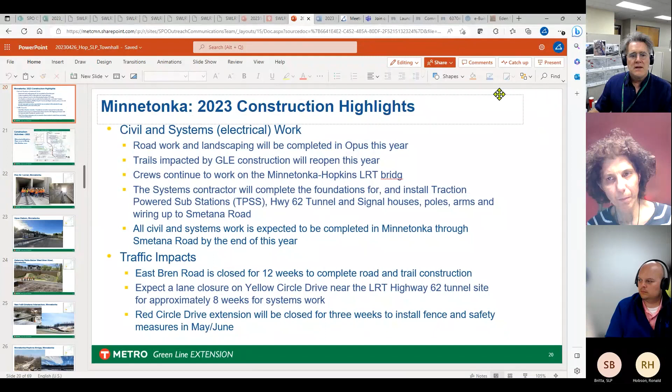All right, for the last time, this is the Hopkins St. Louis Park Virtual Town Hall Green Line Extension Update. It is April 26, 2023.

Today our topics are going to be a general project update, then we'll go through 2023 highlights, talk a little bit about the systems work, which has now begun in the western part of the corridor, as the civil work has been finishing, about 98% through some of that civil work in Eden Prairie and Minnetonka. We'll also cover a brief communications and outreach update, and then questions, answers, and discussion.

This is a familiar slide to those of you who joined us before, where you can see it's a fairly large footprint. Most construction footprints aren't nearly this large. People have apartment buildings and they're complex enough, but we've got 16 new LRT stations, 44 significant structures. You can see a lot of the bridges we've already completed, at-grade crossings, miles of retaining walls, and a lot of complex construction in new right-of-way from Eden Prairie to Hopkins, and then from Hopkins to Minneapolis.

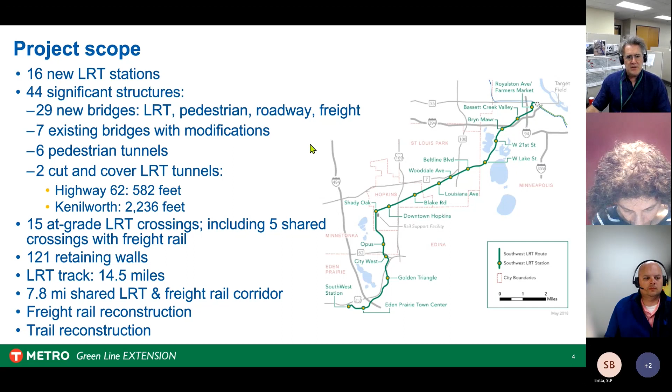For about 7.8 miles, we follow the rail corridor, and we've been partnering not only with our cities but also with freight rail carriers in order to complete that construction. Again, this is a familiar map or slide to those of you who have seen this before. You can see the various stages of construction.

The first year was essentially taken up with a lot of utility work, a lot of underground work. About 2,000 public or private utilities had to be relocated, plus quite a bit of infrastructure we needed to put underground before we could begin what most people identify as civil work—the structures, track, and stations. The second stage was site prep, where we had to take down a couple of buildings.

We have a lot of easements—about 157 easement properties of various sizes that we had to obtain. And then we do the structures and track.

You see a lot of that work today, particularly in Hopkins and St. Louis Park. We'll continue in each segment with the systems contractor as the civil work in the segments is completed. We're already starting to see that now, particularly in Eden Prairie, where you can see the catenary poles. We'll do some wiring there as well later this year, and we'll show you some pictures of that later in the presentation.

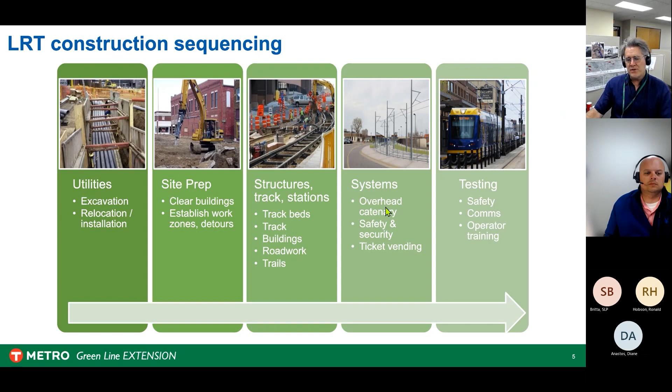When all that is done, we're going to be focusing the next couple of years on a lot of the civil work that still remains in the eastern part of the project. We still have quite a bit to do. We'll do the testing, which will take about 6 to 9 months.

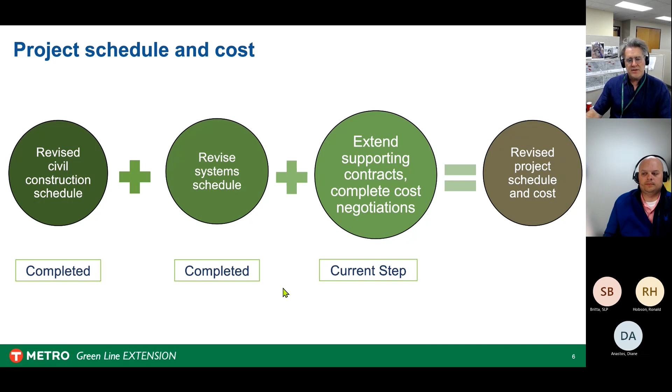We've had some changes, some scope increases to the project that we had to include after we finalized our contract, after it went out to bid and the bid was accepted. We had to add a few things—some of you may be familiar with those, like methodological changes at the Kenilworth tunnel, the town center station, and the corridor protection wall.

We've had to revise the construction schedule, which of course then affects the system schedule, which was already out to bid—we had to revise that as well. When that's all completed, we're now in the process of supporting contract documents, and then we'll come up with a more precise project schedule and cost as we go.

All right, the highlights. We're going to start in Eden Prairie. We thought it would be good to give you a broad view, so we'll go through the whole corridor, but we'll focus a bit more on Hopkins and St. Louis Park.

These are some of the things you can expect this year in Eden Prairie. The biggest issue here—you can read through this—but the one I'd like to highlight is Phase 2 construction at Southwest Station. For those who followed that construction, we've completed the first phase, the largest phase, and added a new parking ramp.

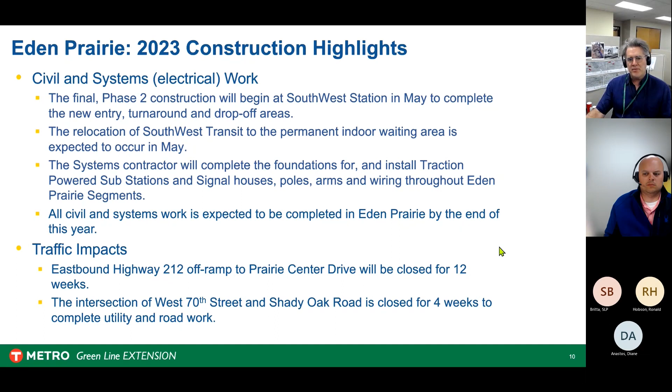The largest impact down there is rebuilding the Highway 212 off-ramp to Prairie Center Drive, which will take another couple of months. Some details here for those who want to look back at the presentation—we basically are just trying to place some of those impacts and some of the work being done throughout the Eden Prairie portion of the corridor.

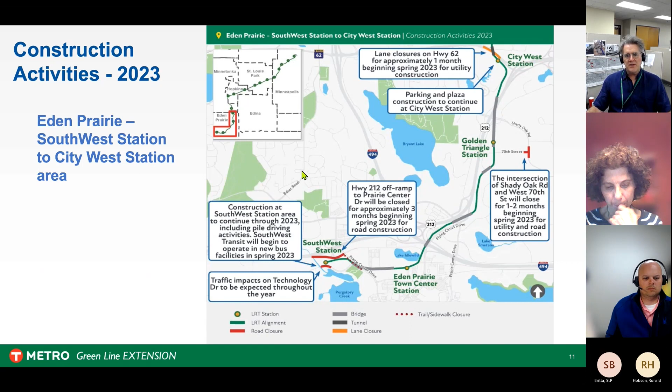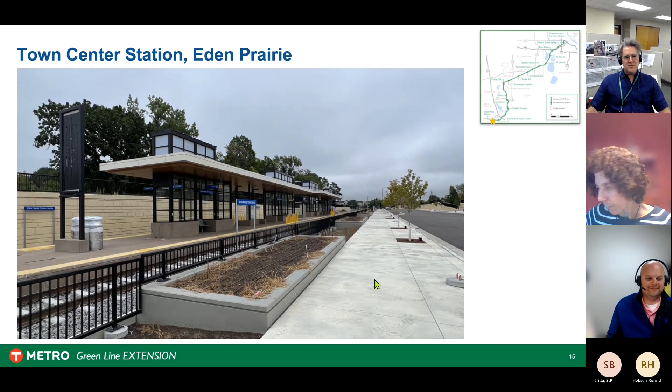And if you continue across our Prairie Center Drive bridge, you can see our Town Center Station bridge. That is actually not a drawing, that is actually a photo, which looks remarkably like the drawing we have shown for many years. It's nice to see that progress in real life.

Continuing on over our Valley View Bridge, through past Flying Cloud into the Golden Triangle area. Just west of West 70th, you enter our Golden Triangle Station. And in the distance, you can see our Highway 212 Shady Oak Bridge.

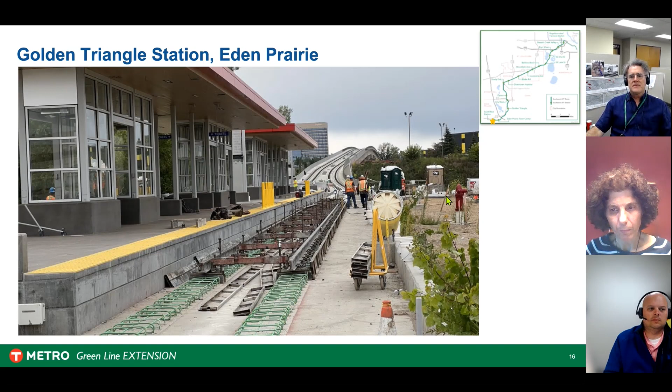And this is looking at that same bridge from the other side. I like to always give a shameless plug here.

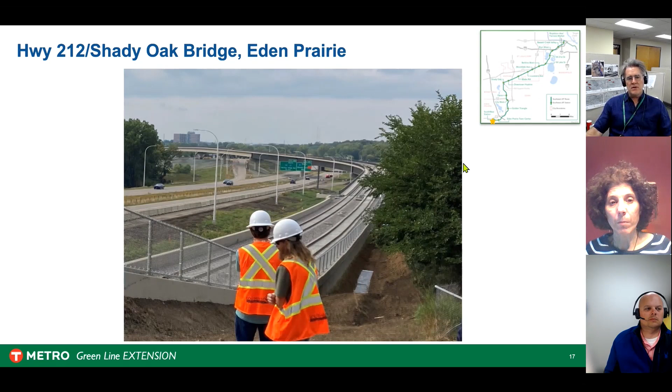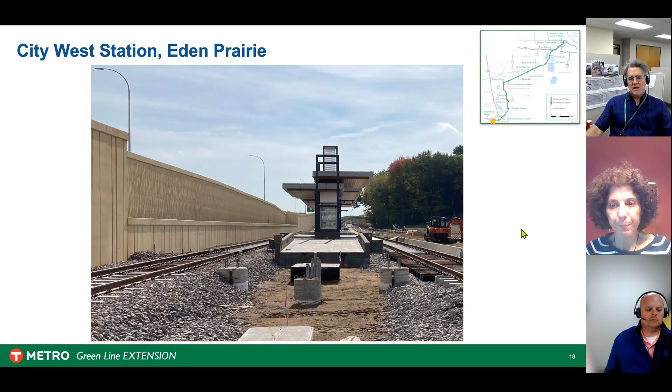All right, continuing from that area where those 2 folks were standing, we take a hard westerly turn along the south part of Highway 62 to our City West station, which backs up to the Optum campus. For those of you who know the area, if you continue a little bit behind the person taking the photograph here, you enter into our first tunnel, and we go under Highway 62 through the tunnel into Minnetonka, into Opus Park. Again, some of the highlights of the systems and civil work this year in Minnetonka.

Again, we'll continue to work on the Minnetonka-Hopkins Bridge. Most of Eden Prairie and Minnetonka, the segments I mentioned earlier, are expected to be substantially complete and turned over by the civil contractor, and most of the systems work, electrical work, done by the end of this year. So that work in that western quadrant is advanced. We expect to have most of that done, but the Minnetonka-Hopkins Bridge from Smetana North to Hopkins will be turned over in 24. We've got quite a bit of work left there.

And as you'll see throughout the presentation, we have a lot of work. Most of the civil work now is going to be focused on the eastern portion from Mount Hopkins to Minneapolis. The biggest traffic impact there, of course, is East Bren Road. For those of you who drove around Opus, my standing joke is that there are still people circling in Opus who we've never heard from again because it's such a complicated circuitous traffic pattern in there.

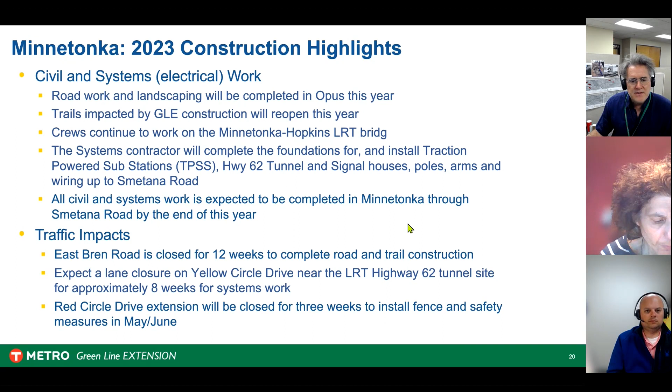So any closure tends to be somewhat traumatic, but this one's going very well. We're closing East Bren Road for those of you in the area for probably another 8 weeks while we complete that road construction and try to finalize our civil work, as well as the trails that we'd like to open by the end of this summer.

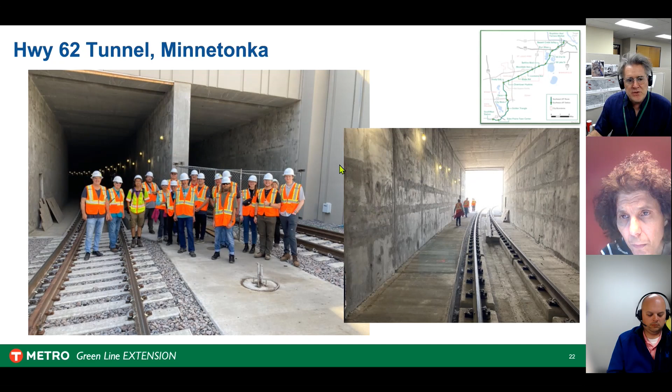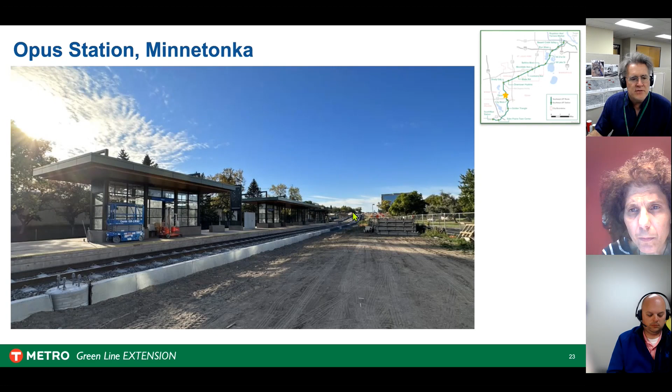And then just beyond, if you continue walking along the corridor beyond that tunnel, we have our Opus station. The tunnel, if you can see my arrow here, is down in this area to the south of that station where the photograph is taking place. And if you go a little bit north of the station, I like to show this picture.

Just as a sideline, for those who haven't been on our tours and don't know, during the design phase each of the cities had an opportunity to participate in that design and had a lot of say. We had a lot of locally requested capital investments, what we call LRCIs. These are special design touches on the corridor that each city wanted included in the project to enhance certain sections of the city. Down in Eden Prairie, you'll see some of the light poles or rails will be a higher grade railing.

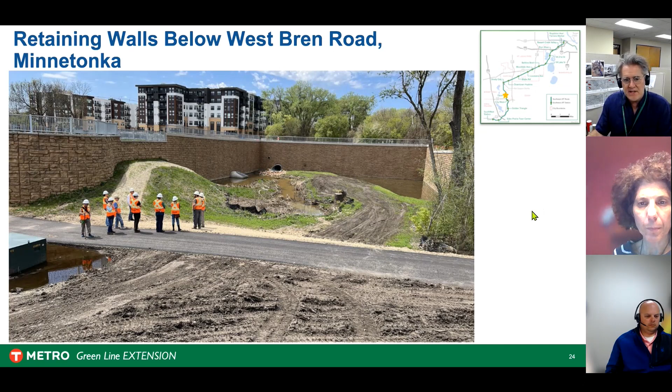Here in Minnetonka, you see these walls with this concrete stamp print where it looks like real rock. It's a very complicated three-tone painting process. And like all the LRCIs, the city helps raise extra money and puts that into the budget during our design phase, and then we do the construction. So anywhere in Minnetonka, that's kind of a characteristic construction element.

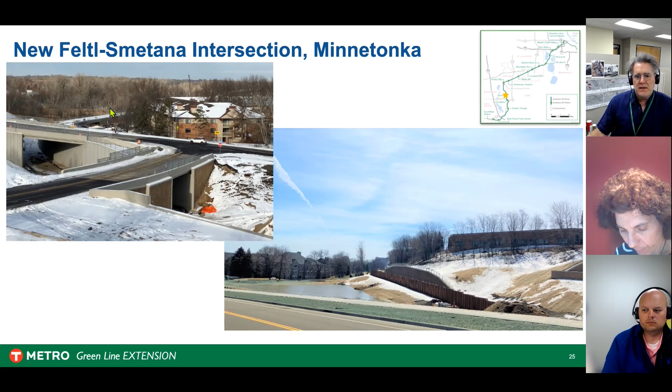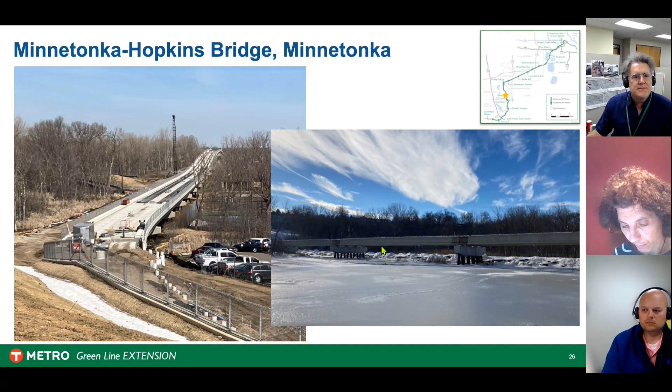And then if we go back to the photo on the left, you're looking at the Minnetonka-Hopkins Bridge, the next photograph. That's the longest bridge in the corridor. You can see how high we had to go at some points to go over the rail corridor, and then we land in Hopkins. That takes us through Minnetonka.

Here are some of the construction highlights that you'll see in Hopkins. We can pause here if anybody has any particular questions.

Do you have any chat questions, Diane? Anybody have any questions so far? All right, sounds good. Thank you, just let me know.

For those who don't know, we also have a major closure on K-Tel and 5th Street, and there's several reasons for that. We're going to do a rail crossing there, and we're reconfiguring the direction of 5th and KTEL. That'll be closed all season. That's probably the major traffic impact in Hopkins this year.

But we're also extending 17th Avenue - I think it's Avenue, though I have a feeling we have street down there, I'm sorry if I'm getting that wrong for residents there. As you know, 17th Street goes from downtown Hopkins past the fire station. We're going to continue that a little bit south of Excelsior Boulevard, and it will go directly down to meet KTEL and 5th Avenue at that point. So there's a lot of work being done there.

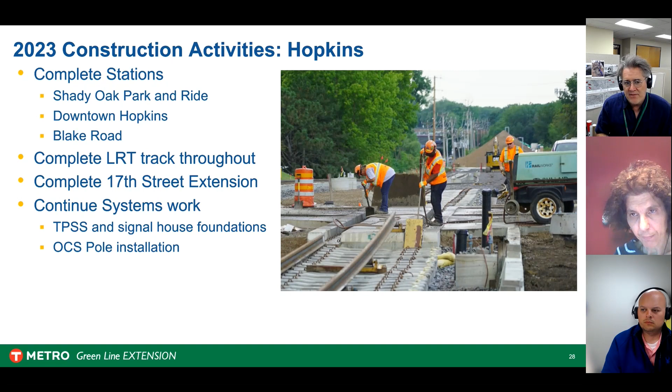And of course systems work will continue as well. So again, just reiterating some of the civil and systems work there - we've got that utility and road work on 5th and KTEL. We'd like to see the Minnesota River Bluffs Trail along that Shady Oak Station area around our construction zone to 11th opened, but if not, we'll get that open sometime early next year. And then we have some plaza work you may have noticed down at downtown Hopkins.

I'd like to ask Andy if he can explain a little bit what's going on there for those who've seen that work and are wondering why we're doing it over again. Andy responds: yes, thanks James - we did receive some comments and feedback regarding the activity at the plaza.

Ultimately, the short answer is the visual appearance of the plaza didn't meet the quality expectations of the council or that of the city of Hopkins. After reviewing these concerns with the contractor, it was decided that the best path forward to correct the deficiencies was to remove and replace the affected areas. So those are the activities currently underway at downtown Hopkins Station Plaza.

Appreciate that, Andy. Thank you. There's somebody vacuuming in here.

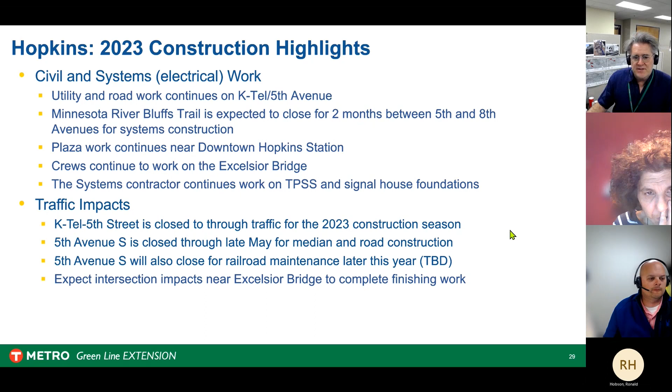Here's some of the photographs in Hopkins. You can see this is kind of our iconic project bridge, the Excelsior Bridge. It's a unique bridge because of the way it's constructed, a form traveler, which means it doesn't necessarily have bridge piers, it's got these foundations. This form traveler is a large piece of equipment where you start in the middle, right over top of these foundations, and you work your way out both ways. Eventually the bridge connects between these foundations, which, as some of you may have witnessed over the last couple of years, is a very unique way of creating a cantilever kind of construction.

Part of the reason we had to construct it that way was we had to get a certain height and a certain design. So we go from the south side of Excelsior to the other side of the freight rail track, but we also had to have it high enough that the freight rail trains could go under it successfully. It's complicated, but it's going to be a very beautiful, very unique bridge. I love the way you can see the swell of the bridge and the direction it goes from one side to the other.

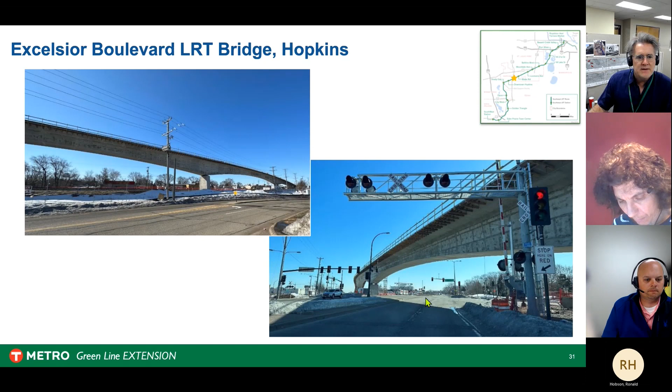This is standing at Pizza Luce, if you know that area, where Blake Road would be behind you going south, and beyond that new development there you've got Blake School, for those who know the area, and this is our Blake Station. Just to the north of that station there's a very nice pedestrian bridge which goes underneath Blake Road. This development is probably important to note, over 800 new units being developed in this area. Behind us on the east side of Blake Road you have another 800 plus units, a very interesting development taking place there. I'd encourage those interested to go on the Hopkins City webpage and see their new development, that's the second one behind us.

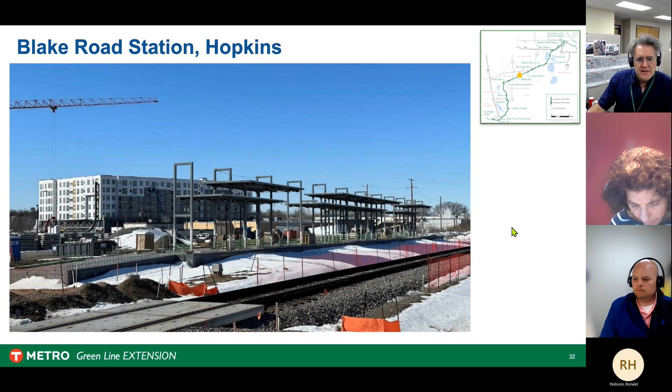Now we'll pause a little bit and talk about trails. Trails are obviously an important part of this project. We're going to reconfigure a lot of the trail system, which we've already been doing. We've been very, very grateful for the patience of the bike riding community.

Excuse me, and thank you for putting up with these closures. I know sometimes it's hard to understand when it doesn't look like any work is going on, but we just try to reiterate that we've had to break up this project because it's so vast.

The footprint is so large, we've had to break that up into work segments. When you give a work segment over to the contractor, they're managing resources over the entire 14.5-mile corridor, so they're sorting things around. That work segment factors into their thinking in terms of sequencing and moving their resources around. So while there may not be something going on at the moment, chances are there will be. Rather than open and close and open and close, we keep them closed just for safety purposes.

It's not the most optimum situation for trail users, but we hope that when all is said and done, you will see a much improved product there and you'll be happy with the results. So again, we thank you if you are a trail user, either pedestrian or bike rider - we really do appreciate your patience.

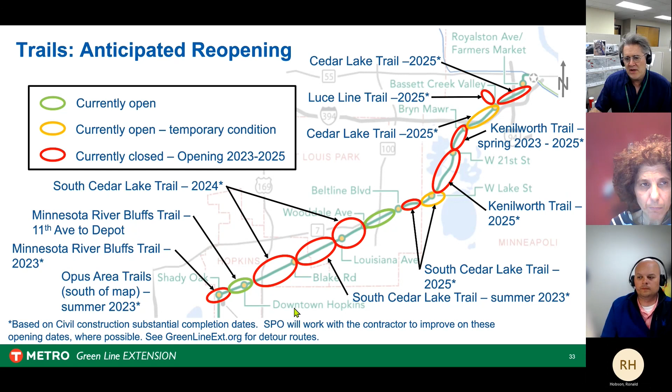I know one person who is really looking forward to the reopening of this whole trail system is our project director, Jim Alexander, who is a very avid bike rider and frequents these trails very often. So you can see here some of the target dates for when we will open, as best as we can, portions of that trail from the Minnesota River Bluffs to the South Cedar Lake Trail.

So you can again see the dates here, the different portions of the trail, and when we hope to have some of those open, and some of those that are open for local use at the moment.

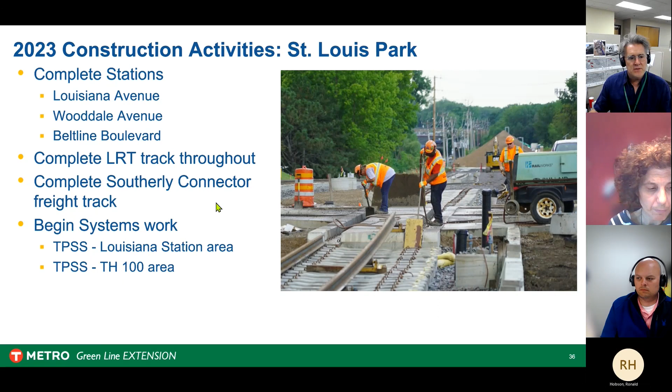LRT track will continue. We completed our Southerly Connector freight track around the Louisiana Station area - that's a big addition to the freight rail corridor. And then we're continuing some systems work in that area, but still quite a bit of civil work left, as we move east out of Hopkins.

And here's some of the activities in the civil contract. We've got Beltline Boulevard - that's closed for now.

Do we have any update on when that should reopen? Beltline Boulevard closure - we're nearing completion over there. We likely have another 2 weeks remaining on that closure. You can see the detour there on the right.

And then for those of you who travel around Railroad Avenue, where Johnny Pops used to be, it's Nordic Ware facility now - we've got a small closure there as well. And then we've got some upcoming impacts this year on Wooddale, Louisiana, and Oxford, and impacts near Excelsior Bridge. Again, as I mentioned earlier, intersection impacts.

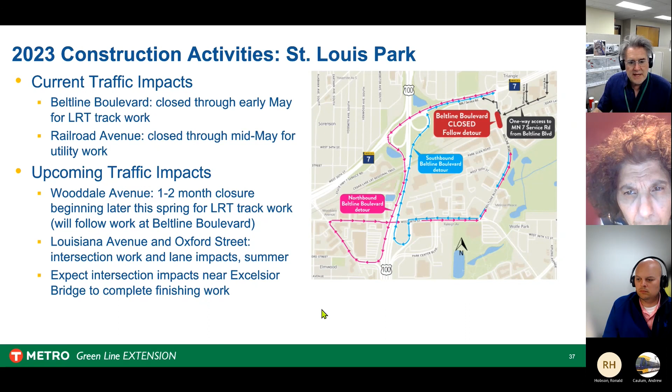That is the best place to consult ongoing work for your commute, or if you want to know what's going on or not going on in your area. So we'll continue to put that out throughout the summer and the fall.

Again, an overview of where some of these impacts and some of this work is taking place in St. Louis Park. And again, as I reiterated, there's been quite a bit of investment. I mentioned the Blake Road development, the Minnetonka development, but you can see the Beltline St. Louis Park development here - in total, we have over $2 billion in permitted and planned community development.

And what's exciting about the development of the apartment complexes is, as people move and populations grow in certain areas, that creates the initiative for small businesses also to grow and move.

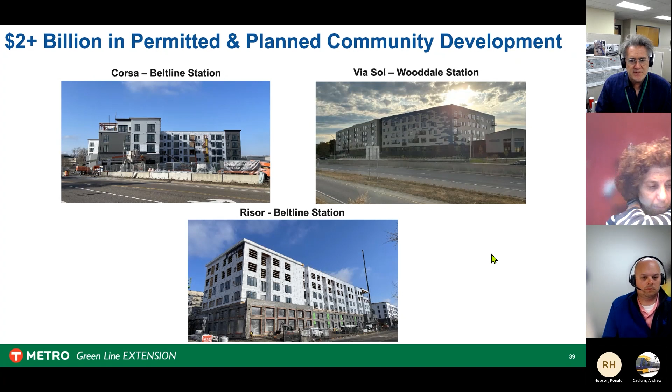It's not open yet. We're trying to get that open as this segment is being completed. We do have a tour, I believe, upcoming this month of this area.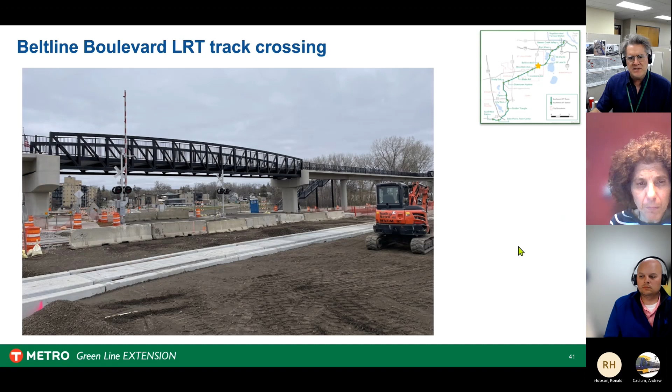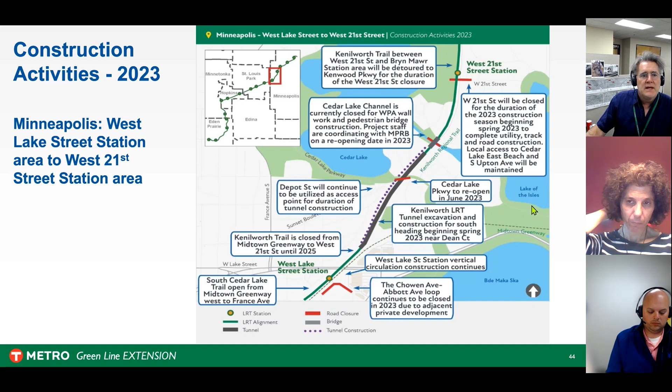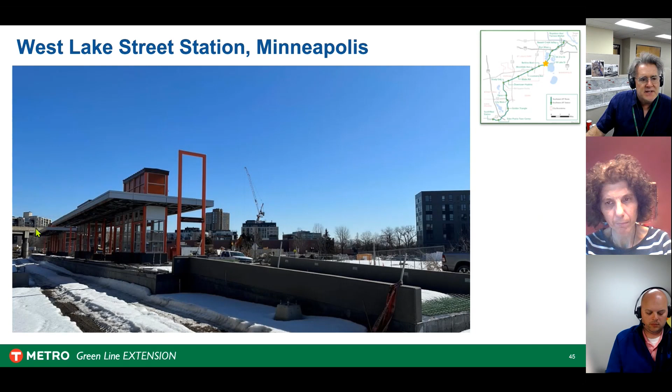That's the West Lake Street, the 21st station. You can see there is quite a bit of work done. The station's West Lake Station in the distance here on the bottom left, you can see the Lake Street Bridge in the distance if you know the Calhoun Towers there. We'll also have vertical circulation, or an elevator, from that station to make bus connections or trail connections for people to that bridge or from that bridge. And then again, Calhoun Towers here on the right.

You can see is the Kenilworth Tunnel. Quite a bit of construction there. We have our Secant construction going on there, and you can see some of the machinery there in that narrow corridor.

For some of you who are wondering, part of the reason the revenue operating date is in 2027 - we've got our testing, our systems. We still have quite a bit of other work that still needs to be done throughout the corridor, but we also have quite a bit of work to still do, about 50% I think, and you can correct me if I'm wrong, on that tunnel. And because of the narrowness of the corridor and the complexity of the construction, you can only go at a certain pace. So it will slow down a little bit. Have work done on the north side and most of the work on the other side. And that'll probably be one of the areas we'll wrap up last with systems when we get that far.

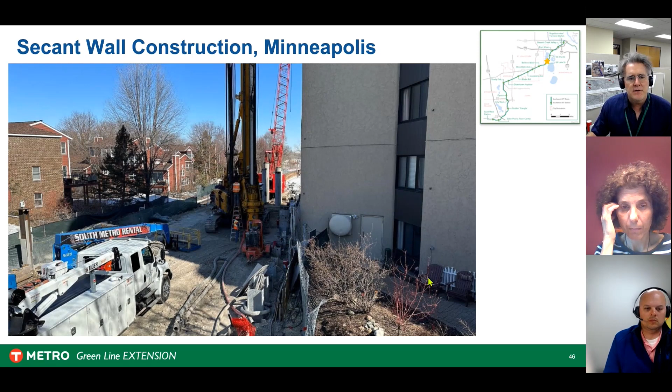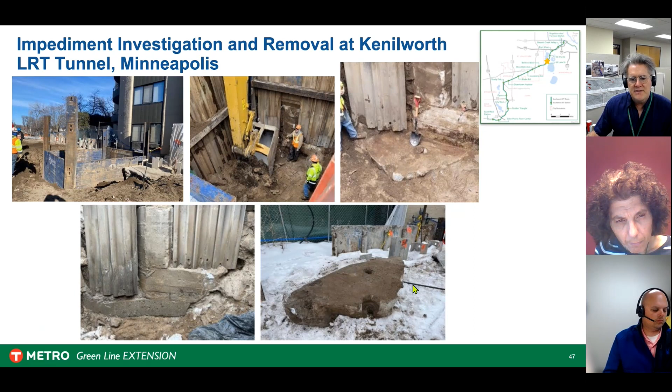Some of you may have read about what we call the impediment investigation. On the bottom right, you can see there was a superfluous portion of the old silos that the Calhoun Isles apartments were built around that we ran into. We do thousands of borings during the design phase, collecting all sorts of information throughout the 14.5 miles, and we just missed this little corner here on the bottom left. So when we were doing the Secant construction, we hit something and did this investigation. You can see some of the stages of that in the photos above. It turned out to have no impact, obviously, on the construction or especially on the towers, but you can see the portion of that concrete that we eventually cut off there - that's the actual impediment you see on your bottom right.

Nice photo, right? Deep down inside the bowels of the Kenilworth Tunnel. You can see it's a very deep trench, a very complex construction. You've got the waterproofing down below, and a big slab that's anywhere between 8 and 12 feet. Then that's the foundation, and then you have the structure, supportive excavation on both sides, and then the Secant construction. You can just see how complex it is.

For those who want to see that up close, we still have the best view available of that construction for a short time until Cedar Lake Parkway reopens this summer. We've had to put a trail, a passage across the tunnel. We had one earlier, a bit north of where it currently is, but you can stand out and overlook the tunnel, see the finished tunnel looking south, and see the ongoing structure and complexity of construction looking north. It's a great time to view that tunnel. We also have tours of that tunnel coming up, if you'd like to go down into it.

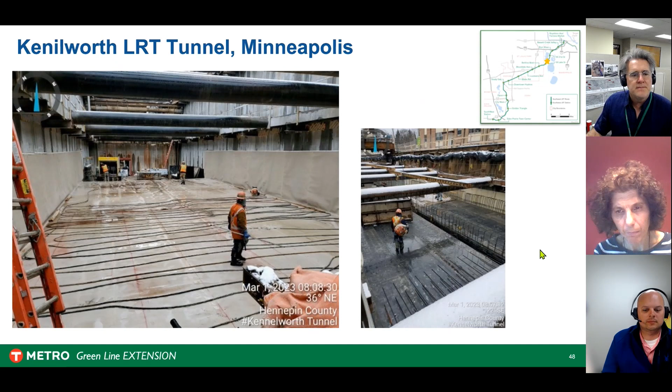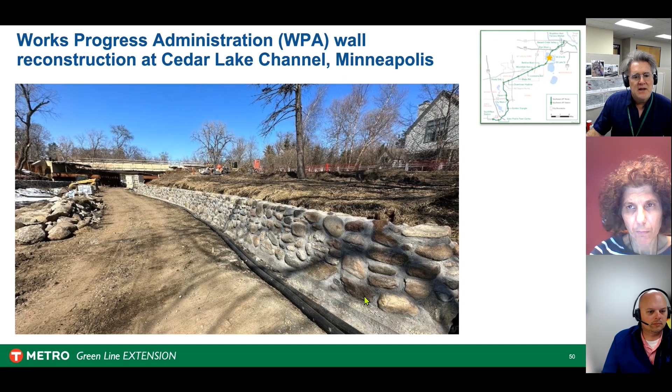As I mentioned, we have our Cedar Lake Channel pedestrian bridge, the 3rd bridge. We had the rail corridor bridge, the light rail bridge, and now we see the pedestrian bridge being built. Alongside that is the Works Progress Administration, WPA, wall construction at Cedar Lake Channel. This is an old historic wall, identified as historic property during the environmental process. It was in a dilapidated state in a lot of areas, so we rebuilt it according to the archaeology and historical records to try to make it look as authentic as possible.

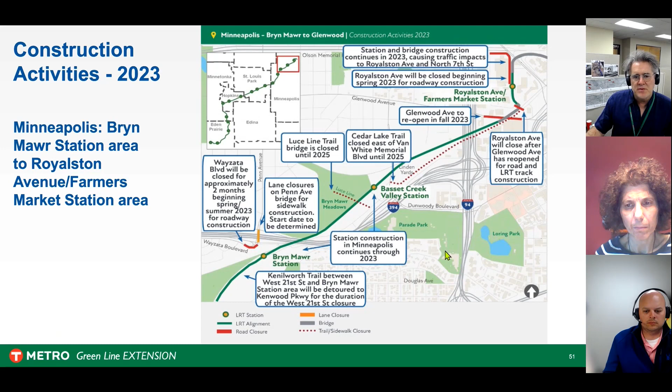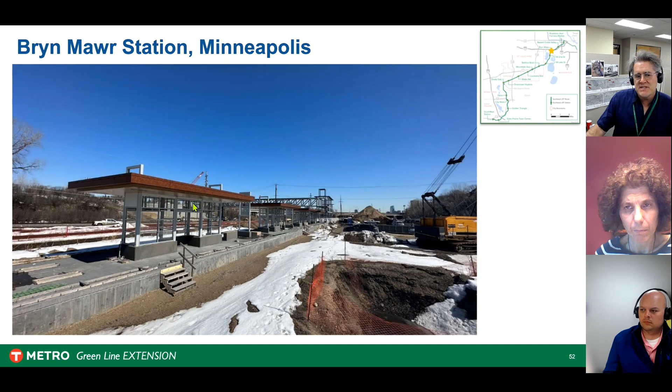That's nearly finished. For the next phase, from Bryn Mawr to the end, Target Field, or the Royalston Farmers Market area, you can see quite a bit of work on the Glenwood Avenue Bridge. There'll be some more closures as we move forward there. Here's the Bryn Mawr station in the distance above it. You can see, following my arrow, the pedestrian bridge that will go to just south of 394, where there'll be a parking area. Continuing down that corridor, there'll be a great trail alongside, leading to the Bassett Creek Valley station.

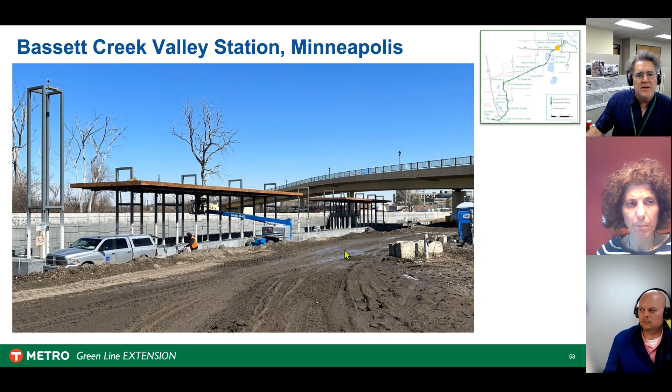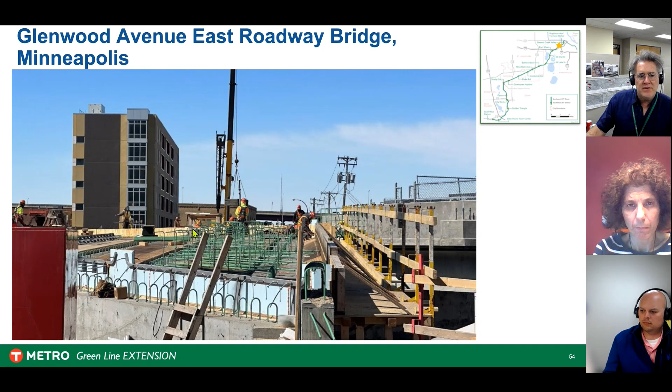Here's the Glenwood Avenue Bridge, a very complex bridge. We had to build it at the same time as a grade crossing, with a crisscrossing of the LRT bridge with that new portion of the Glenwood Avenue Bridge. It's pretty amazing construction. Then, near the end, or the beginning depending how you look at it, you can see our 5th Avenue, 7th Street LRT bridge. This is where we connect with the stem from the previous Green Line at Target Field in the distance. Those of you who know that area can see the Hiawatha Metro Transit building.

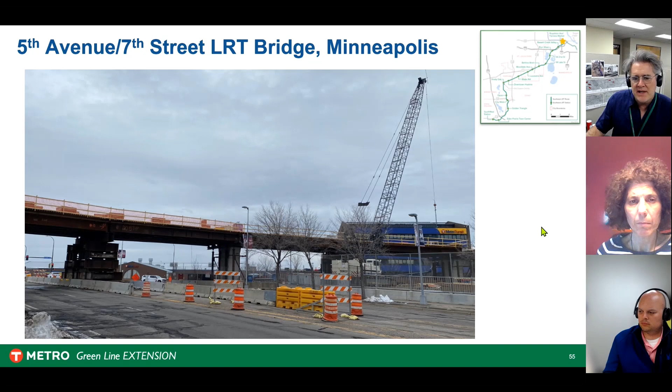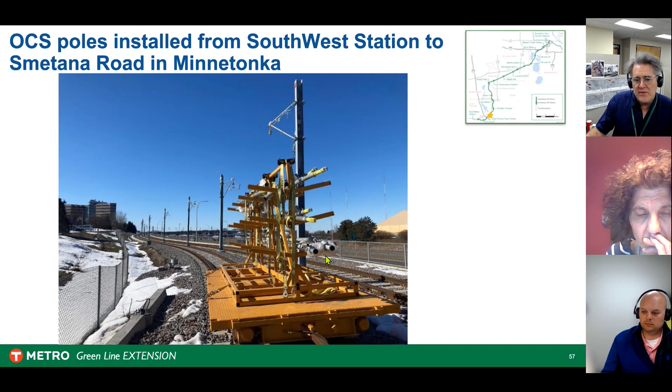You can see how much progress has already taken place down in the western quadrant of our corridor. These are very interesting pieces of equipment. I like to highlight that because most of this work is done on the rail corridor, there is nowhere near the impact to the public when we get to this stage. Most of the equipment used is outfitted to run on the rails, the high rail system, big trucks and dumpsters and everything else needed to transport the various elements of the systems project staged throughout the corridor. So it's very low impact compared to our civil construction.

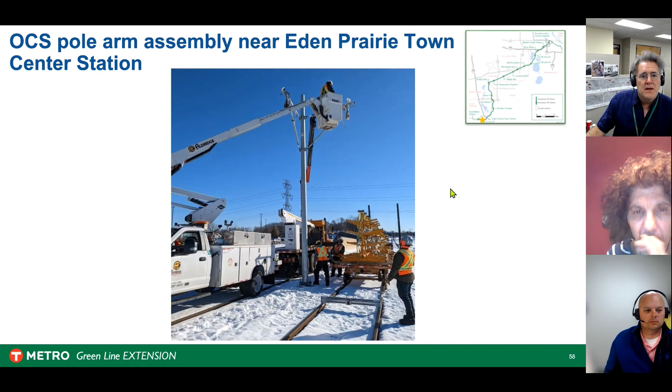Again, you can see the OCS poles, the electrical poles. The civil contractors already put in those foundations, and the systems guys come behind them and put in the poles, and we put the pole arms on. Of course, we have about 19 traction power substations. For those familiar with the other LRT lines, you've probably seen these. They're big, like container boxes, 40 by 10, and they weigh about 47 tons.

And it's all full of electrical equipment where the AC becomes DC and powers the alignment. They're basically staggered every 3/4 of a mile or so.

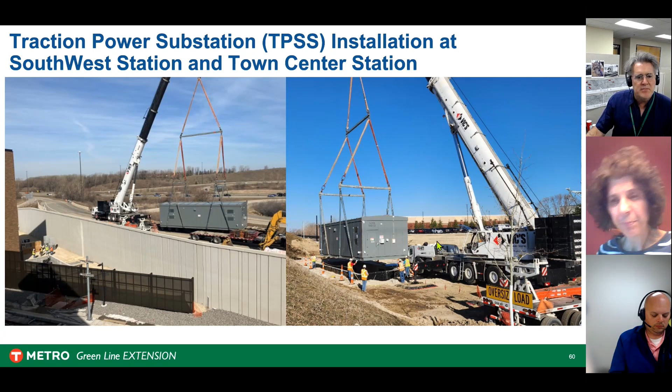And of course, we have the signal arms, and all of this equipment has already been delivered, and it's all up at a Golden Valley storage site.

All right, communications and outreach update. Again, you see Diane on the screen there. Diane is one of our two new coordinators, and Katie Kurt is our other coordinator, and Katie will be focusing more in the Minneapolis area. In addition to her duties down in the western outreach duties in the western quadrant, Diane will also be our tour coordinator.

So she'll be handling that process, and continuing to make it more efficient. We like to make our tours a little bit better for the public so that they enjoy them and get the most out of them. As far as tours go, I mentioned we have 3 per city, but we also like folks to know that if you have a group and you'd like a tour anywhere in the corridor, we're more than happy to try to arrange that for you as well. It doesn't have to just be one of our official tours.